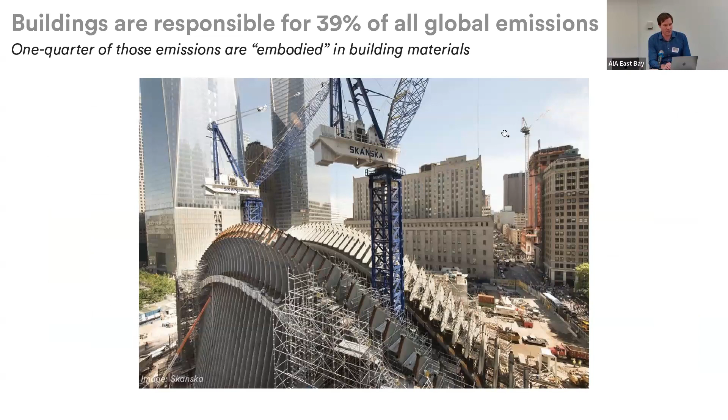So some of those, the embodied emissions, is the building materials, all the stuff that goes into a building. And the other three-quarters, the 28% of the 39%, is energy use that comes from sometimes fossil fuel used on site, but often energy from up in the Central Valley, or in big natural gas plants hidden away in things that look like buildings around the Bay Area. So a little out of sight, out of mind, but a really large contributor to emissions associated with building operations.

So we'll get back to this and try to break that down. I want to use this to show that over the course of, say, a building that'll exist from now until 2050, the building in this time will have approximately the same proportion of emissions. Depends on where you are, we'll get into all that, it depends a little bit.

But there's a little bit of operational emissions that build up year over year, and a big surge of embodied emissions in year one that persist. And we see that over the course of, between now and 2050, about three-quarters of emissions come from operational energy, like the energy used in buildings.

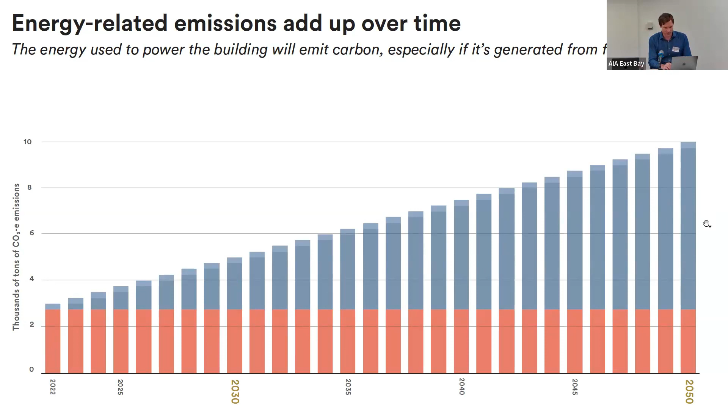And this is why for a long time, the 2030 commitment and all of these efforts have been to reduce energy use in buildings and to electrify them so you're no longer burning fossil fuels on site. Because when you have an all-electric building on a clean grid, the line starts to curve down. The delta, the additional emissions in each year, gets smaller year over year as the grid gets cleaner. You're using the same amount of electricity from a cleaner source upstream.

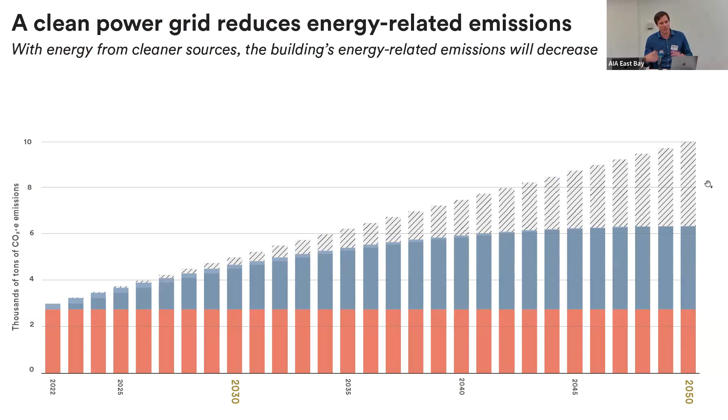And the real thing has been: we're going to electrify buildings and make them more efficient. Then you're able to get to a situation like this, which is really exciting to see. Not only is the grid getting cleaner in the background, but you're using less energy each year.

Question: is there a controversy going on right now about where the embedded, or where the operational energy, is coming from? Those sources are themselves destructive.

Yeah, we can talk some about that when we get into what embodied emissions look like for things like PV. It doesn't always... When questions come from the audience, repeat them in the microphone. So the question was: well, wait a minute, don't all these upstream clean energy solutions have impacts of their own that aren't always accounted for? This may be an interpretation of that question.

Sure. And I think one thing often lost - we can get into this over drinks too - but one easy answer is that yes, there are upstream impacts. We mustn't forget that fossil fuel isn't just the thing we burn in our gas tanks, refined up in Richmond, it's also an extractive industry with massive impacts. The amount of land that's contaminated, all the water that comes up with the oil then cast over fields, there's salt and minerals and heavy metals in that.

So in an apples-to-apples comparison, we shouldn't discount the environmental impacts of clean energy. And let's also recognize that it's not just burning fossil fuels that's the problem, but also the landscapes across which they're extracted. Does that make sense?

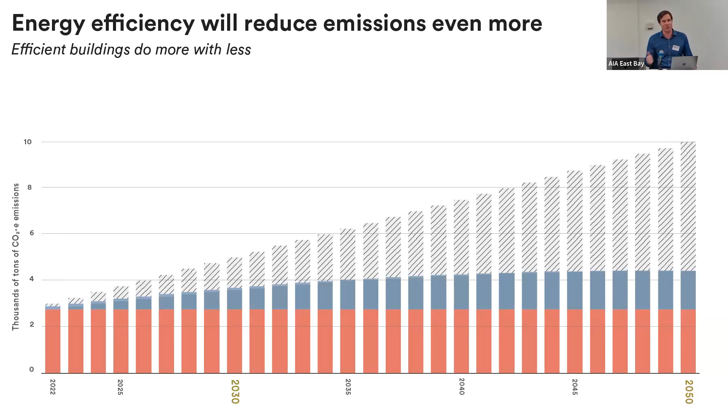So when we combine electrification on a clean grid with energy efficiency, we get to something that looks like this, where in 2050 it looks like we're doing pretty good. This is a little bit more than a 50% reduction in emissions over this time.

And if we're going to get to these big reductions by 2050, we're doing a pretty good job overall. The problem, though, is that we don't just care about emissions in 2050. If we cut the same graph in 2030, we see that most emissions between now and then near-term climate targets are mostly embodied carbon emissions, the stuff involved in the supply chains of the materials coming to the building. These are things like the environmental impacts of the solar panels, the cladding, the insulation, the carpet, the gypsum wallboard. These are most of the emissions the built environment will incur in the near term that we need to address to meet short-term climate targets.

The 2030 target is generally important because hitting lower overall global emissions by 2030 gives us the opportunity to restrain global warming to 1.5 degrees Celsius and avoid some of the worst tipping points.

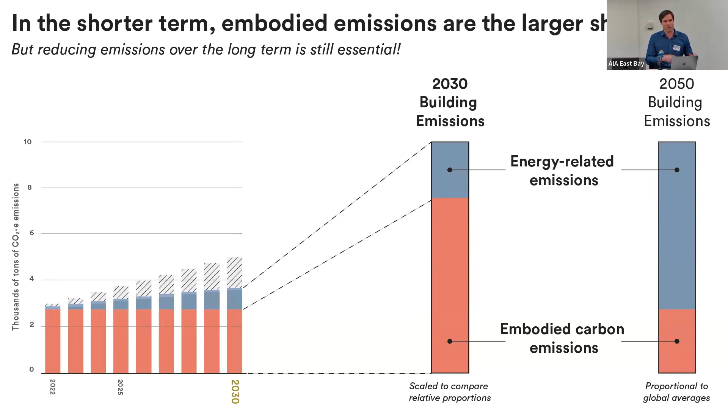So we see that when we think about near-term carbon emissions, we're really focused on embodied carbon. When we think out into the hazy future, because buildings use energy a lot over time, it's operational emissions. The point of this talk is to talk about whole life emissions, how we think about embodied and operational emissions together. If we're just talking about embodied emissions that happen in the first year, so much can be done in terms of specifying better materials, using less materials, using biogenic materials that come from natural sources.

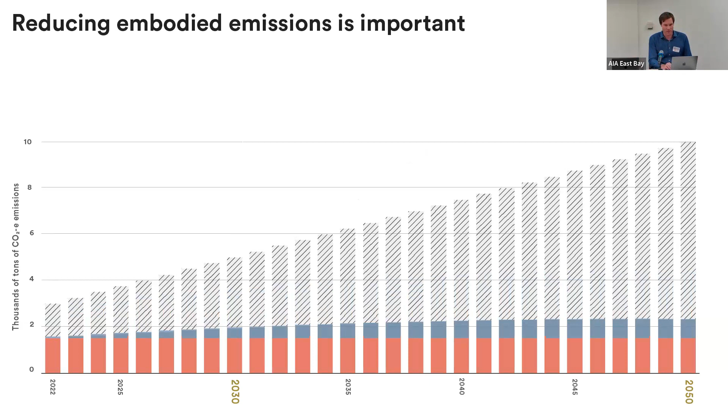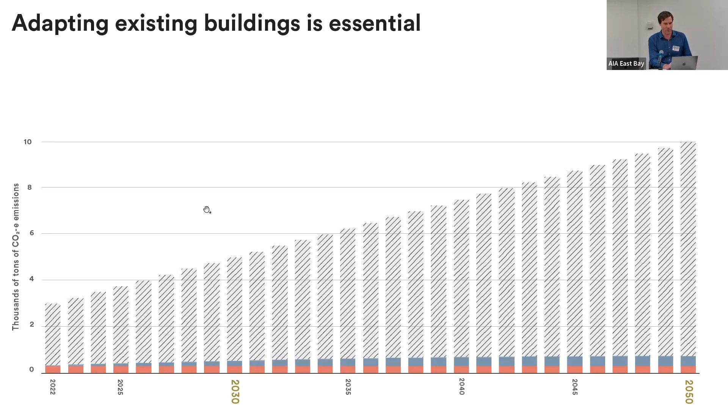But to pass it off to Larry, the most important thing you can do that avoids all those near-term emissions, so you don't have to be caught in these awkward choices between using a bad and a worse material, is to use what's already there and avoid building by adapting existing buildings. And I think I'll use that to tee up Larry for the care part of the presentation.

New building takes a lot of carbon to build. And over the next near term, the 20 years that we're really concerned about, it's about half the carbon. So we've got to start either building low carbon buildings, which is hard to do, or just building fewer buildings, which is the one that I think we should be doing.

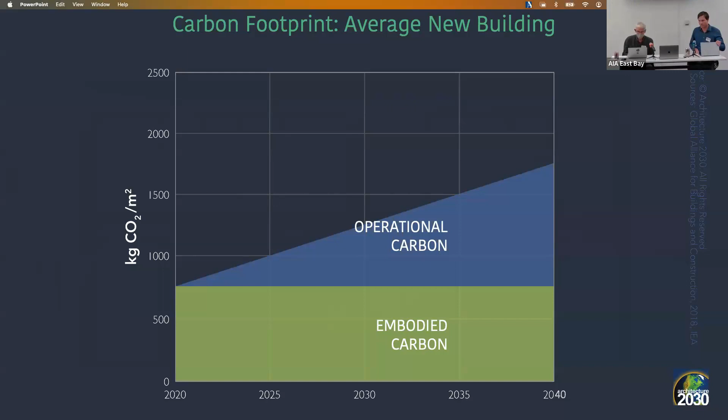So that's just for new buildings. We have a lot of existing buildings, and operating existing buildings are still responsible for the majority of emissions. These are for cities around the world, and you can see that it ranges from 55% to 76% of our emissions in those are all from buildings. So it's a huge impact of just operating the buildings we already have.

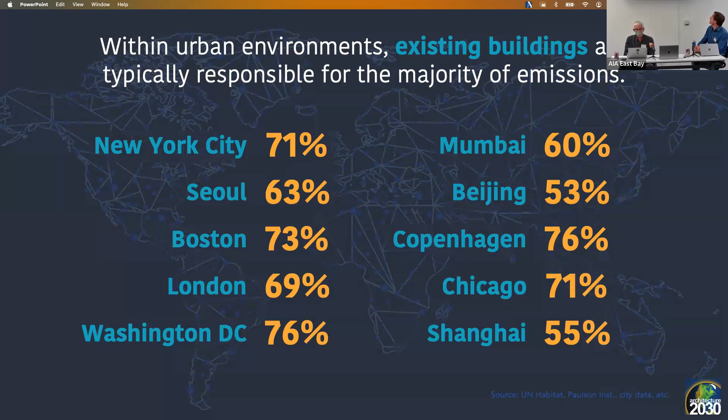And the other thing to remember is that about two-thirds of the buildings that are with us today will still be here in 2050. So they're not going away. We've got to make them better. So this is really a pitch, not just for reusing a building instead of building a new one, but for making our existing buildings perform better.

All right, so this is another interesting thing: AIA did a survey last year and asked about the main reasons they got for remodeling buildings. Last year was the first year, maybe the second, where billings for architects were greater for renovations than for new buildings. That's interesting, it usually happens during a recession, but it's continued after the recession.

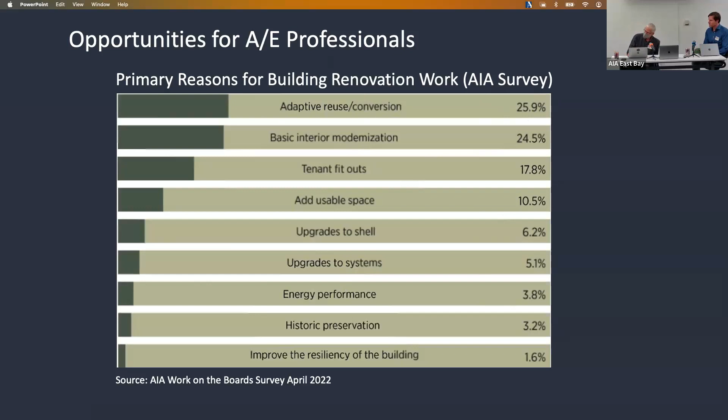So the greenest building is the one that's already built, but it's also, more importantly, the one that's been upgraded.

So I'm going to talk about the CARE tool. In February last year, Architecture 2030 launched this tool, a carbon estimating tool called the CARE tool. It's designed to do quick upfront carbon estimates comparing a reuse project to a new replacement building.

I've been working on this for about the last almost 4 years now with Erin McDade of Architecture 2030 and Lori Ferriss, who's currently chair of AIA COTE and the Zero Net Carbon Collaborative, and a lot of other things. She's actually now working at Northeastern University at a research fellowship. So there's not a lot of us working on it, but we're trying.

So it's an early phase decision-making tool. It evaluates total carbon emissions and compares the impact potential of existing building reuse to new construction.

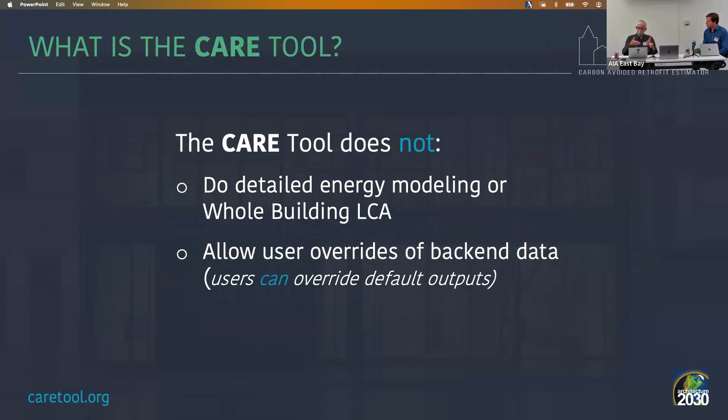It does not do detailed energy modeling or whole building LCA. It does not allow users to override backend data, although you can override some of the default settings built into the tool about grid efficiency or your climate. If you have better climate data than what it defaults to, you can enter that. So you can make some changes to it.

It's designed for stakeholders from across the building sector. We're really focusing more on planners and officials, campus planners, than on architects and engineers, since it's not really a design tool. It's designed to help with early decisions about whether to build a new building or reuse what we've got. There's lots of reasons to reuse a building or not, but we're trying to put carbon into that conversation.

If the owner or the client is interested in saving carbon, that's the first thing they can look at. Is this going to save carbon, putting a new building in, even if it's net zero or not?

And it's really interesting what you get when you start feeding this into the CARE tool. So I'm going to do a case study of EcoBlock, which is a project our firm has been working on for more years than I like to count.

Susie's the project principal on this. It's a really interesting project, and very different from the project you saw from Jack, because it's a bunch of little single family wood frame buildings. It's a really different kind of building type than we usually use for carbon analysis, which is usually concrete and steel, big massive buildings.

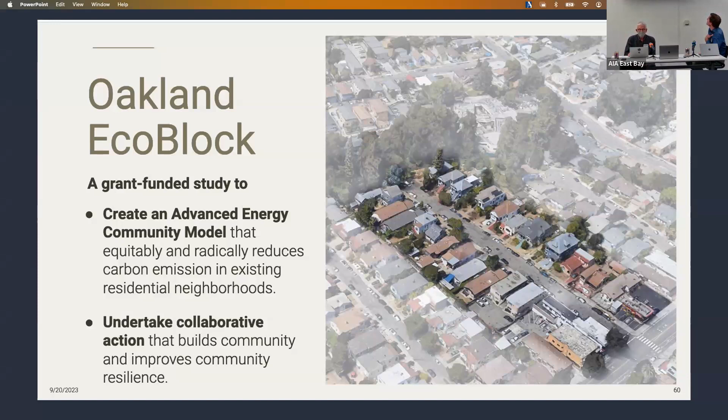So this is what EcoBlock is. It's a grant-funded study that creates an advanced energy community model. It's collaborative action, encouraging collaborative action to build community and improve community resilience at a block scale. And the reason it's at a block scale is, if you can imagine doing the same amount of solar conversions on an individual scale, it's 180 individual projects versus 9 block projects. So it's supposed to be easier.

It hasn't always proved to be the case, actually. PG&E has some problems with doing things at a block scale, but it's happening. And it's actually going to have to happen at that kind of scale if we want to meet Oakland's goal of being at net zero by 2040.

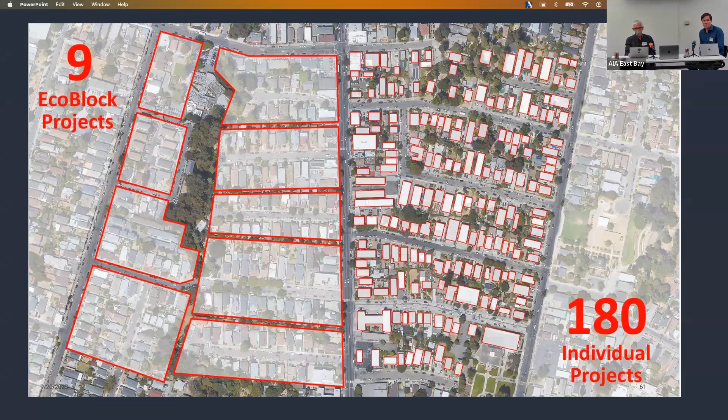Anyway, Susie should be giving this part of the presentation. So, block characteristics: there's 24 dwellings on the block. I think we're converting 18 of them. They're small projects, small buildings, pretty much all wood frame, 1 to 2 stories, built between the turn of the last century and the 1970s.

There's 18 projects. So here we go. Energy efficiency: the project includes efficiency and electrification retrofits, shared rooftop PVs, shared battery and microgrid if we can get the funding for that part of it, a shared EV charger for the block for a car, and a whole legal and financial structure of shared ownership, which is actually really key to making this work at a block scale.

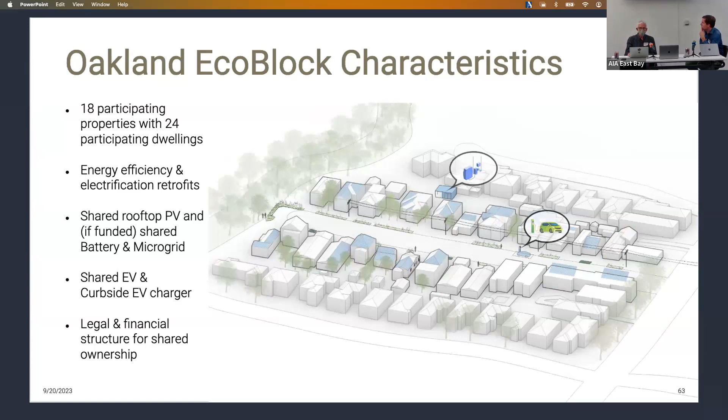Here's the block, a very cool block. It really was a case study in how, not only are we doing this great energy upgrade and this great climate project, but it really brought this block together.

A few key people really wanted it to happen, and they brought almost all their neighbors on board. It's just been this amazing sense that people at this scale, this kind of ownership, and this kind of income level don't usually have access to impact anything about the climate. It's out of their control. And this is sort of saying, actually, if you do it together, you can make a huge impact. I think that's pretty inspiring for the people that live there. It's been inspiring for all the people working on the project. So it's pretty cool.

Upgrades to the building envelope are pretty minimal. We live in California after all, it's a pretty mild climate. So they're doing attic and underfloor insulation, but they're not replacing windows. They're not doing wall insulation, which is too expensive. They're doing air sealing, which is critical, and it's pretty simple to do.

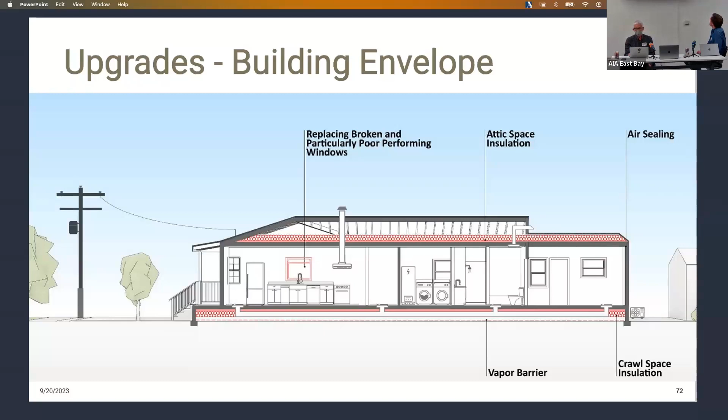And then a lot of mechanical upgrades. Everything's going electric, so all the old appliances are being replaced with efficient electric appliances. They're doing a heat pump for hot water and a heat pump for space heating. They're putting in hoods and things to improve indoor air quality as well, so ventilation.

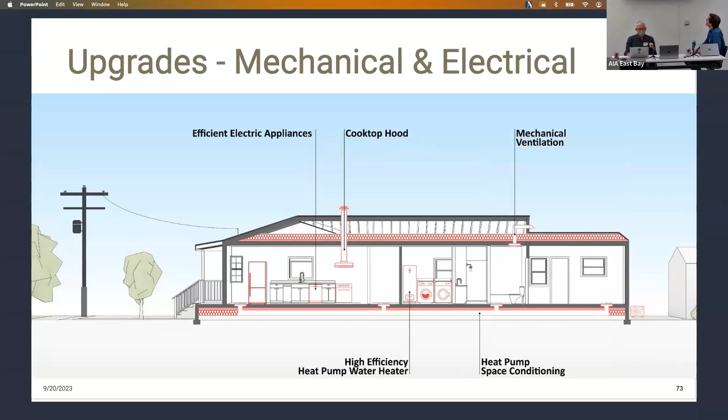Outside, everyone gets a charger and a service upgrade if needed. I think almost all of them need a service upgrade, maybe not all, but a lot. They're actually reconsidering that, and some of them are not requiring a service upgrade.

That's great. What is kind of a minimum service upgrade for a site? Everyone tells you to go to a 200 amp service, but you can actually do it on a 125 amp service. You do have to sometimes do load shifting and things like that, but you can do it. I just did it for my house and we went to 200 amps, but it's because we thought we were going to have an ADU in the backyard, and that kicked us into the 200 amp. If we hadn't had that, we could have done it on the 125.

Then rooftop solar — all the houses are different, so some houses have a lot of space for solar and some don't. The idea is to put solar all over and kind of share it for the whole block, which PG&E is also having some issues with, crossing property lines of power and things like that.

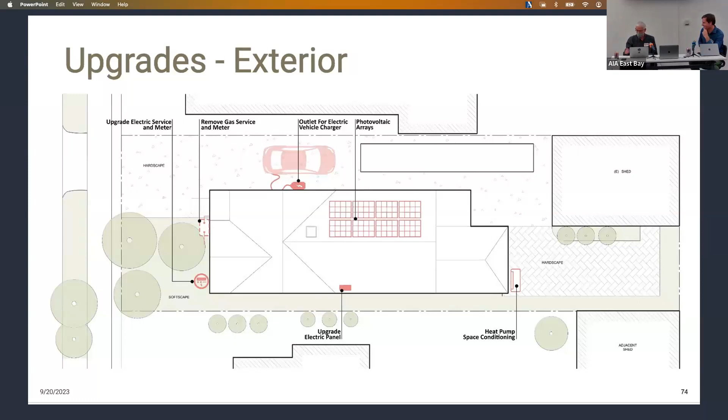This shows the difference in the level of building performance. In a poor performing building, getting to the level we need is a 71% reduction in emissions. But in a pretty good performing building, it's only a 28% reduction. So every building is being brought to about the same level of performance — some buildings need a lot of work, some don't need very much, and it averages out over the whole block.

Running this through the CARE tool, the first thing you see is the screen with four tabs across the top. You input general information about the project's location, which sets the defaults — it sets your climate zone and basic grid information about how efficient your grid is for the whole state.

But you can go in and change that. For the grid settings, we selected high renewables — by 2040 California is aiming to be at high renewables, that's their goal. You can leave it as is, which is what it is now, say high renewables, or say net zero grid by 2040, which most states probably won't meet but California will get close to. Then you put in the model time frame you want to look at, and because 2040 is our cutoff, we're saying 17 years from now, to see what performance will be like in that time.

Then you put in information about the existing buildings. In this case, we used a total square footage for all the buildings since they're all the same type, all wood frame. We picked the type of structure, wood frame hybrid — wood and steel, or concrete, or steel and concrete — which generates some of the embodied information. You put in the use, and since there's no single family use in our calculator because it's based on the zero tool, we used multifamily, which is about as close as we can get.

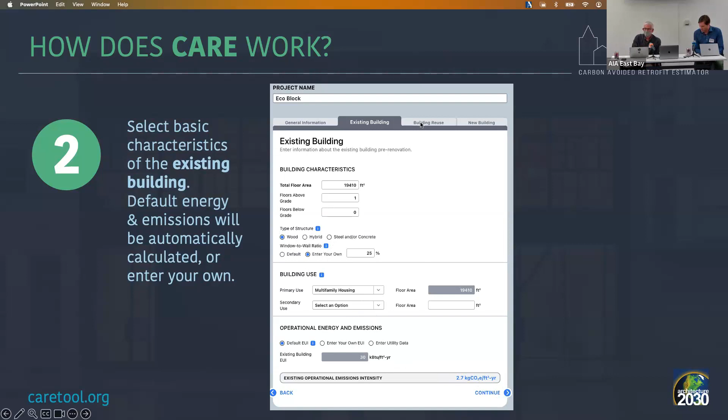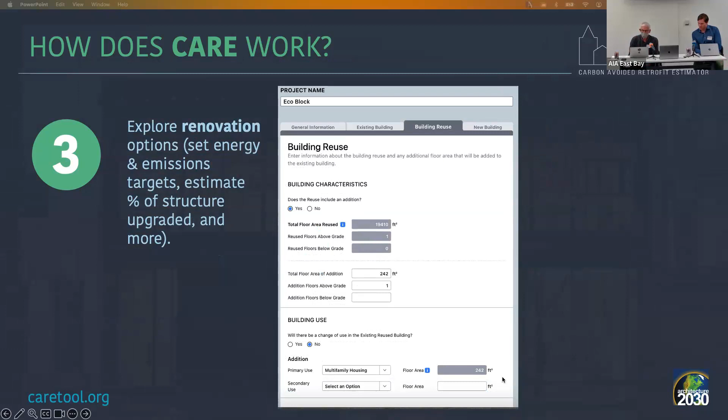Then the next tab, you look at the renovation options. You set targets for operational emissions, estimate the percentage of structure and other parts of the building that need to be upgraded. You put in the same information about whether you're adding an addition, what's the square footage that's changing, and a lot of information about your targets for building efficiency.

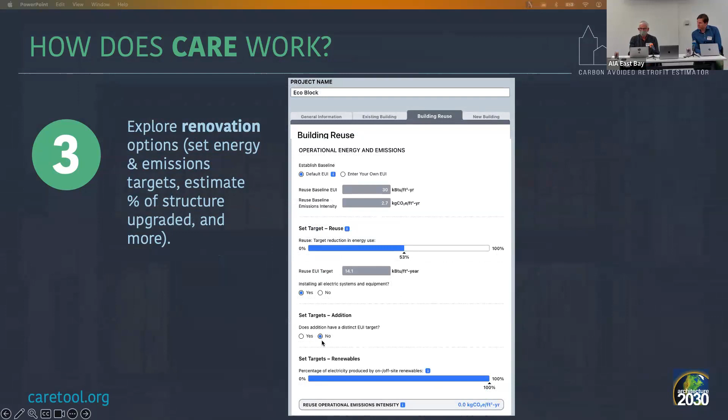In this case, we're saying about a 53% reduction in emissions was what this was modeled at. 100% renewables and all electric is what this building's going to be when we're done. All the buildings will be.

Then you put in different tabs where you can look at the different pieces of the building. Structure is the big one. In this case, we're not doing anything to the structure, so that stays zero. The envelope, we're doing nothing to it, actually very minimal. We're replacing some roofs, adding insulation at the roof level, which isn't counted with that. Interior reuse, we're leaving alone. Mechanical's the big one—we're replacing all the mechanical systems, heat pumps, a lot of the wiring, some plumbing, so that goes up quite a bit.

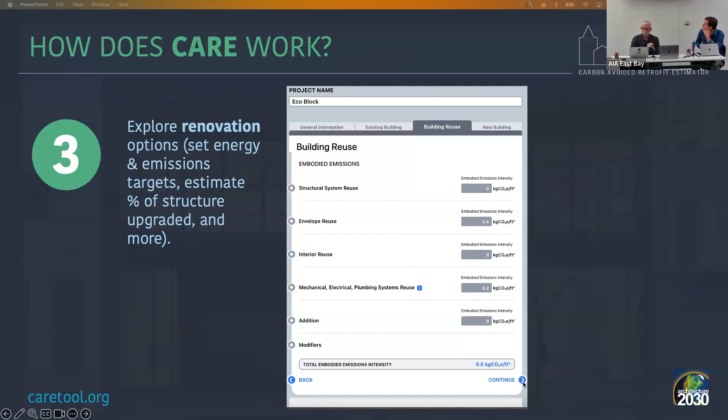So this sets your embodied footprint for the remodel, and you get both operational and embodied footprint.

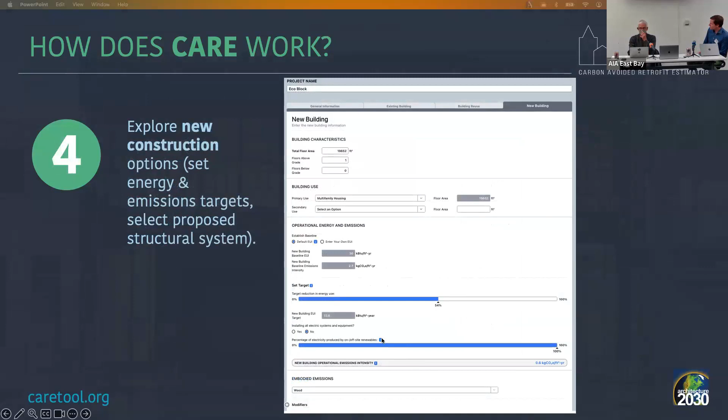And then the next tab is the new building, a replacement building. You would, in this case, replace it with the same type of building, a wood frame building. You'd set the same targets for this one, and the same—it'll be all net zero and all electric. And then you get the charts.

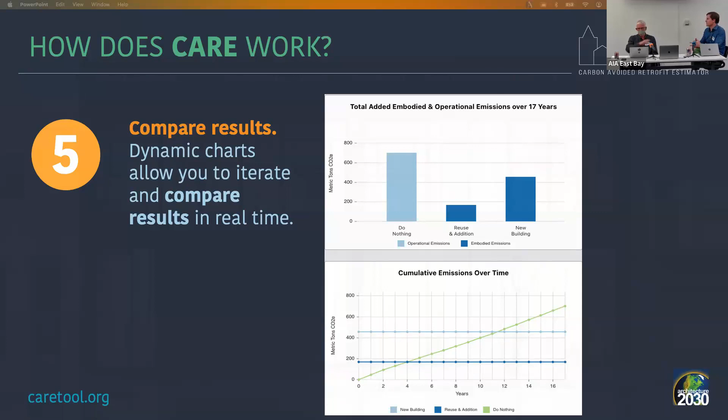So, I think these are just more of Aaron's little tabs that come up here. Pretty cool, huh? Okay. All right, here we go.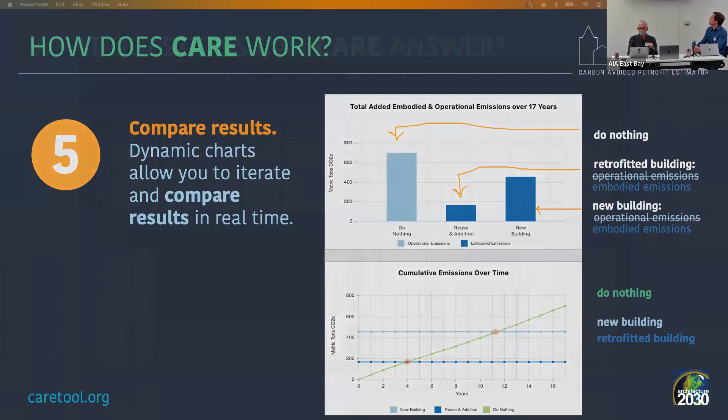So these are some of the questions that you can answer by using the CARE tool. How much carbon can you avoid by reusing it compared to remodeling compared to replacing it? What if you can only reduce its operational emissions by 50%, but you can replace it with a new net zero building? It's really interesting to put that in, because sometimes if you can go to net zero and really can't make the building more efficient, the new building's a better choice.

What are the impacts of geography, grid intensity, and condition of the existing building? It's really interesting to put the same building into California and then into Tennessee or Wyoming and watch what happens to the grid—the emissions are much higher because most of their electricity is coming from coal, so it's really high. Those are also really interesting.

And then looking at the bigger picture, can this contribute to carbon neutrality targets? And then if you're into historic buildings, using it to look at the greenhouse gas benefits along with historic tax credits, things like that. So there's a whole lot of things we're trying to do with it.

One of the things that's interesting is that it's now set up to do it on a single building level. The next phase of this project is to try and do a portfolio level, so you could actually look at a whole portfolio of buildings at once. A city planner could use it, a campus could use it. We've done one campus study, but we had to enter every building ourselves, and we're trying to come up with a way to do a portfolio. That's in the next round of funding for this.

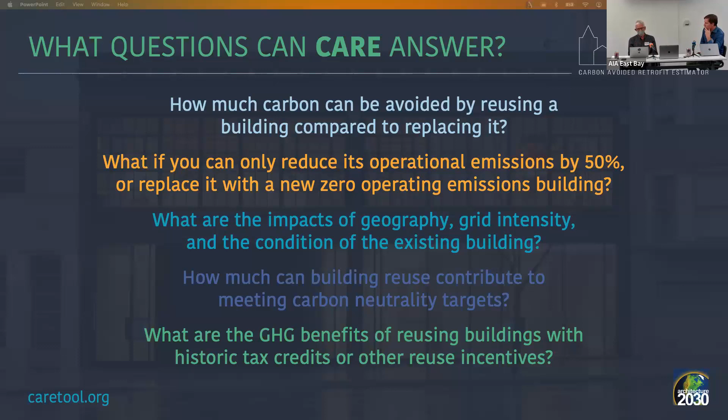So that's it. I think I have to get out of this.

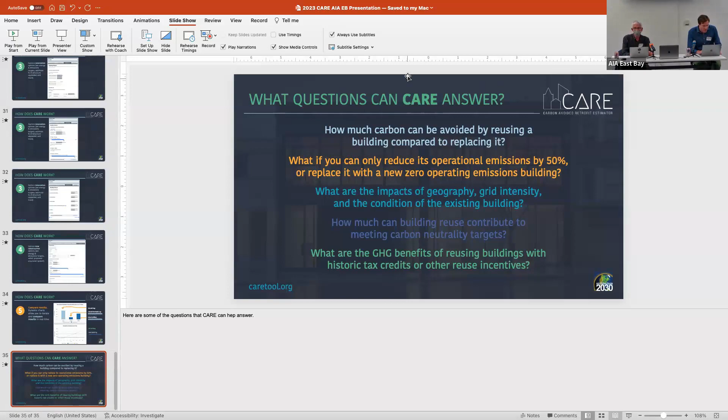Stop share. Craig asks, do blurry faces contribute to climate impact reduction? Craig, the answer is yes. I don't know, just a silly question about blurry faces.

Cool, I'm going to take it from there. As I finish the tech stuff, I'll start by asking the audience, people in this room or on Zoom, how often are you doing energy modeling on a project? Is this beyond Title 24, like a performance energy model? Is it all the time? Anybody all the time? Some of the time? The best of times, the worst of times?

Anybody on Zoom want to contribute on how much they're doing energy modeling? I'm looking at the chat right now. Thanks, you look at the chat. Has anybody here - somebody says rarely, clients are not requesting it. I do it anyway. Thank you, Craig.

Anybody doing LCA, life cycle assessment, on their projects, or done some sort of embodied carbon analysis of any kind on a project they're working on? Starting a little bit, right. A yes, good, a yes. Okay, awesome. Anybody using Tally? That's a common one. Some people using Tally.

Does that work? Oh, right away - I love it. Crosswalking energy to carbon, right? Not all energy use is the same, so you've got to understand how it works. There's all sorts of funky variations. We know in California that when you turn your lights on during the day, there's actually very little carbon on the grid a lot of the time because there's a lot of solar in California. When you turn your lights on at 6pm, the grid is sometimes really struggling because everybody's getting home and turning the lights on, running their dishwasher, turning on the television, cooking on their electric stove. So there's all these funky variations by time of day. I'll just say there's variation - there's a difference between carbon and energy.

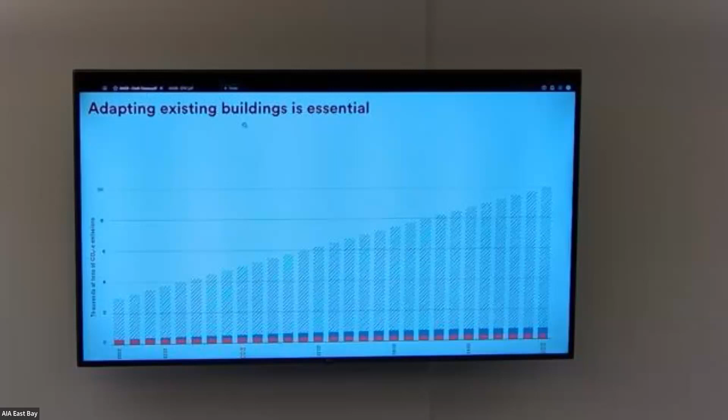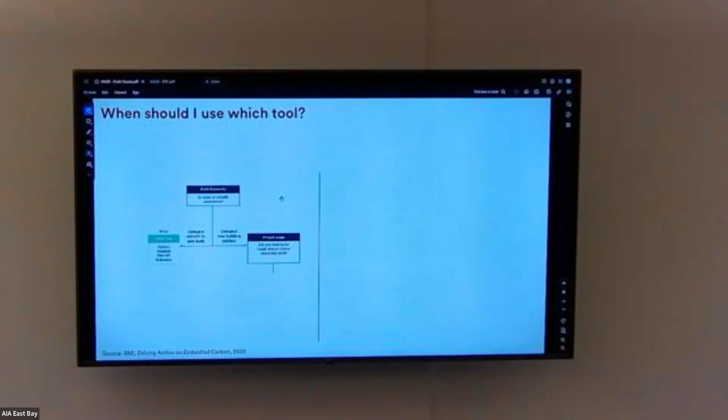Tools like EPIC and CARE really help you make that translation, and I think both of our intentions did make it pretty accessible. One thing to talk about is when you use which tool, because there's a lot of tools out here. When do I use Tally? When do I use this or that? This is a figure I'll walk through from a recent report by the USGBC and the Rocky Mountain Institute, their Driving Action on Embodied Carbon in Buildings report, which is being presented as a preview of what might end up in LEED v5.

The first question they ask is: is the building necessary? Are you considering reuse or retrofit? They say, what might you do then? If you're comparing retrofit to a new build, the first stop is CARE, right? In this decision tree about what to do when, CARE is the first stop as you're considering this difference. Okay, are you comparing different new building options? For whatever reason, you weren't able to find a reuse strategy. Then it asks, are you looking for a rough idea or higher resolution of data?

And I'm going to do this - they do it in a long thing, I'm doing it in two columns to make it work on the slide, apologies for this. They say, okay, that gives you two decision points here. Do you need early guidance to drive decision making, or do you need detailed guidance because you actually already have the bill of materials for the project? Jump up to this side where it continues - if you're looking for early guidance, that sounds great.

You have two choices. You can use Athena, the eco calculator, a simplified LCA that comes out of Canada—super cool, assembly-based tool. You need to know a bit about the building to assign all the assemblies correctly. And it gives you all the different indicators, not just carbon.

If you're just looking at carbon and energy, this is where Epic, the tool that I work on, comes into the flow. There's other things you can do, like Kaleidoscope, an excellent free resource from Payette, for comparing different building systems. And Carbon Designer 3D is an awesome tool built into the One Click ecosystem—pay to play, a little expensive, but a great tool.

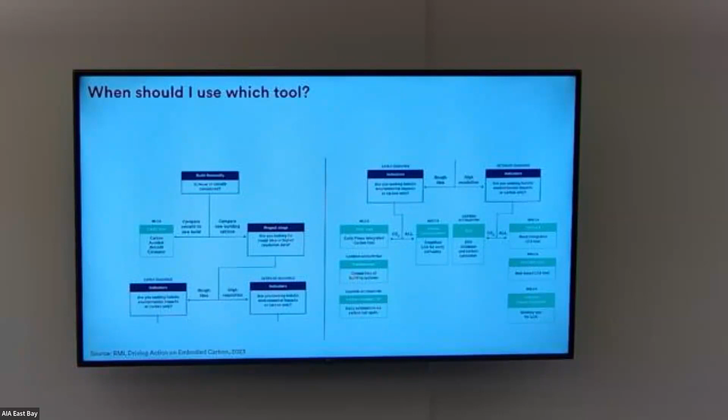Okay, now my part of the show. I'm going to talk about Epic, which is our early design tool we've been working on for a couple of years. But really, another thing I want to call out here is that, yeah...

Oh man, sorry everyone, too many steps here. Yeah, gosh, sorry y'all. Okay, how about now? Oh, I see it. Wonderful.

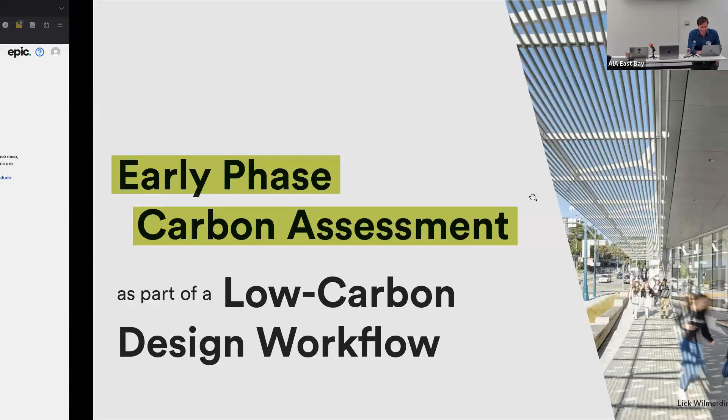Early phase carbon assessment is really just one stop along the way. The goal is to have this integrated into our design process in whatever way we can, so that as we're making decisions on a project, we're getting feedback about the carbon emissions. Epic is one tool to do that, but it takes a village across a project and across the landscape of software solutions.

So I'll talk a little bit about Epic and give a demo—I think that's the easiest way to do it sometimes, live. Epic, like Kaire, is a whole life carbon tool: embodied carbon, operational carbon, landscape strategies, hardscape, and as of recently, refrigerants—all the stuff that moves through the pipes.

There's a lot of different strategies you can investigate with Epic. The question is always, what's the one best thing I can do on my project to reduce its carbon emissions? The correct answer is: it depends. Epic is a tool for investigating what it depends on and making your own strategies and determinations.

For a long time these decisions were made by a few firms, by experts who'd been doing this for 10 years and could stick their finger in the air and figure out which way the wind was blowing. The idea of tools like Epic and Kaire is that this actually needs to be in the hands of every designer on every project.

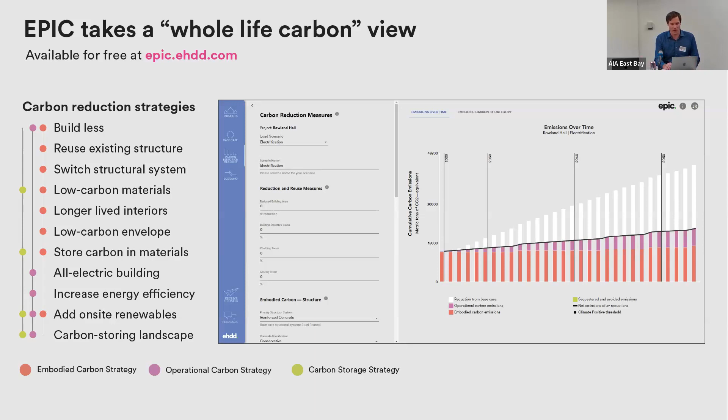And actually, a lot of those experts do a lot of projects in California. Like Larry was saying, if you do that same project in South Dakota, you'll see a totally different set of patterns—where the materials come from, the local concrete available, the grid you're attached to. So if we're making decisions based on local context, we need more data before doing projects in other places. Tools like this that contain that data help designers make those decisions.

They come out of the earth, they're transported to some sort of factory, they're manufactured. From there, there's the construction process from the factory to the job site, assembled on the job site. And that process from raw material extraction to installation—that's the A phase of buildings.

The B phase is all the things we do day to day, like living in buildings, the use phase of buildings, maintenance, repair, mowing the lawn, vacuuming the carpet, replacing the drywall, repainting, doing the facade upgrade at year 20, using the energy every day. And then the C phase lives in the distant future. This is the end of life of the building, when it eventually gets demolished, disassembled, sent to landfill, recycled.

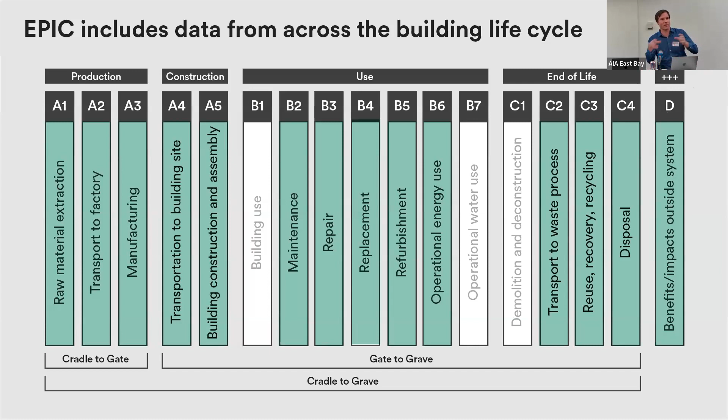Whatever else will come to it, incinerated. And then the D phase is this special phase that we use to talk about things that are related to the building, but not in it, and typically benefits. So for instance, if we are generating solar energy on site, that's great. We're not producing any carbon emissions with our electricity. If we're going to make a claim that we're actually displacing carbon emissions that would otherwise happen on the electrical grid, that's a D phase thing. We're making a claim about something we're doing on the building, it's important.

Something else is happening in some other part of the world. That lives in the special category where we talk about it, but we have to sort of put it in air quotes, because it's not a direct thing—we're not actually avoiding carbon, we're incurring something happening elsewhere. Or when we talk about timber, you say timber stores carbon, and that's true and important. Actually, the sequestration of carbon in timber happens in the forest, it doesn't happen in the building. So that sort of sequestration of carbon is also a D phase thing—something we count, something we care about, but we have to put it in brackets off to the side.

And these are the sort of components of a life cycle assessment, where the goal is to measure through this process all these different impacts and benefits.

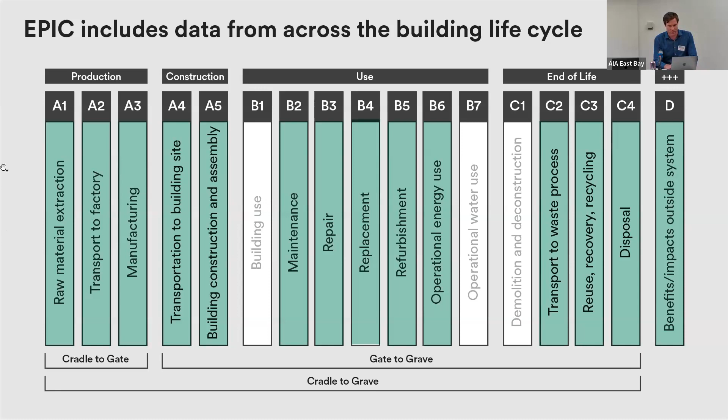So typically when you're doing an LCA on a project for LEED points, you are looking at the core and shell of the building only. For a long time, it seemed like embodied carbon snuck up on people. People were really worried about energy use, had it kind of figured out, and then they're like, oh my gosh, all these materials go into buildings, and we had never really considered this before. If you're just looking at core and shell, you're really in for a treat, because a lot of other stuff goes into a building as well.

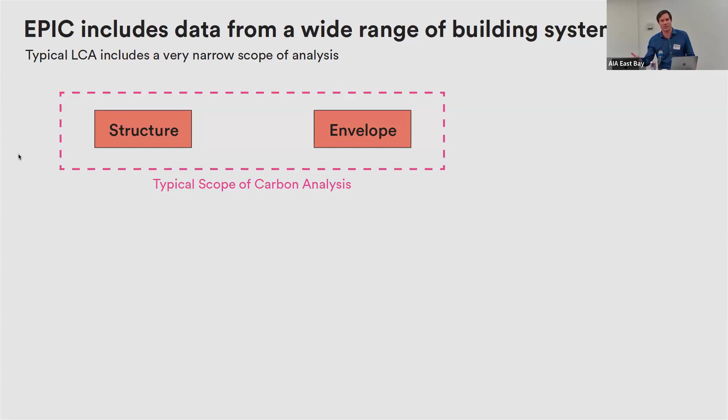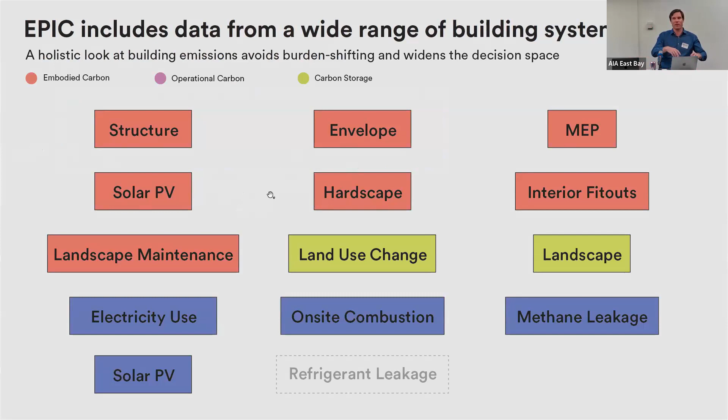We're really trying, in Epic, to expand the scope of the analysis so that we're not blindsided again in 5 years. Okay, we sort of figured out concrete and steel well enough—well, then the things we have to worry about are the MEP systems, the solar panels, and other clean energy stuff that has emissions associated with it. Hardscape, everything beyond the building. Interior fit-outs is a really big contributor, especially in retrofits, and all these other kinds of contributors to emissions from a building. So the goal of Epic is to put everything on the table and let project teams figure out where the biggest impact is to be had.

This is the kind of anatomy of the model, and it's a simplification in a sense, but it's all true. What Epic does is you define in the tool a basic building, a sort of shoebox building. And then from that building, the model does a set of material takeoffs, a set of assembly takeoffs. So it says there's this much concrete in the structure, this many square feet of envelope, and the building uses this many kBTU of energy per year.

Against each of these takeoffs that happens against the building, we assign a set of GWP factors—GWP is global warming potential. So the carbon emissions associated with the concrete, with the envelope, with the energy use. And then that gets all rolled up into the results of the model. So it's this pretty simple process: define a building shape, figure out what's in it, add some carbon data to what's in it. And then what you get to do as a user of the tool is play with all those little toggles, change the shape of the building, change what the materials are going into it, change the amounts of different assemblies, and change especially the carbon intensities of those materials.

That's sort of the purpose of the tool. And then in the tool, you'll see there's pretty good documentation, we hope. It's been developed mostly through feedback from people using it, to make sure that all the data behind the tool—its assumptions and its methodology—are transparently communicated, so that it's helpful to project teams in setting goals on projects.

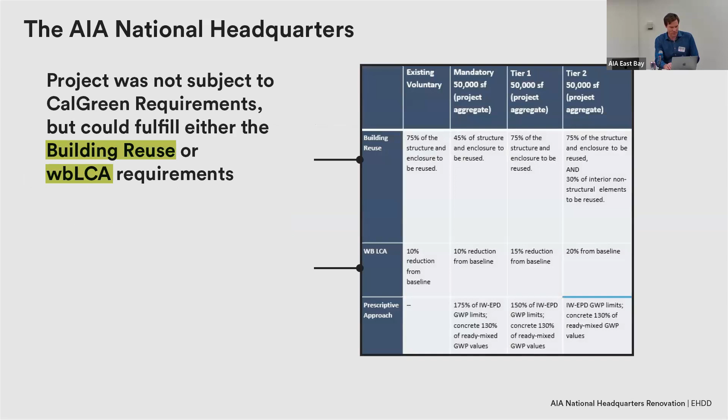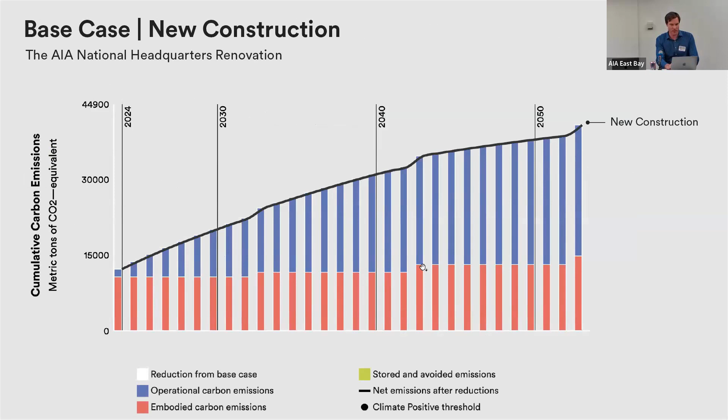What we're going to do, we put forward on day zero during the interview phase of the project, we used Epic to show this strategy, where if this is emissions from new construction, here's the year one emissions, there's all these little replacements over time, here's the accruing emissions from energy use. If you retrofit the building, your emissions in year one go down to very little, and there's still some emissions over time, obviously.

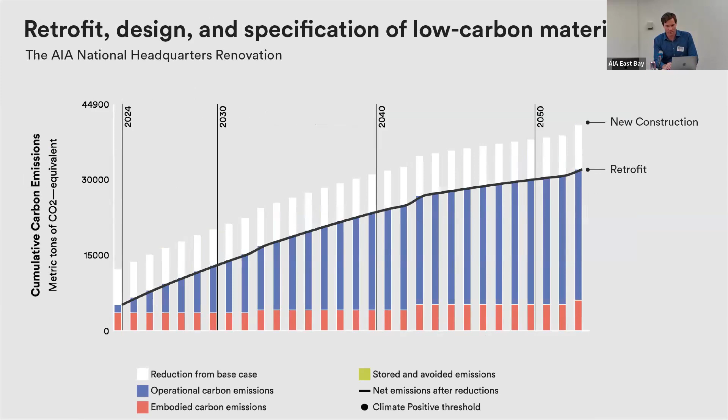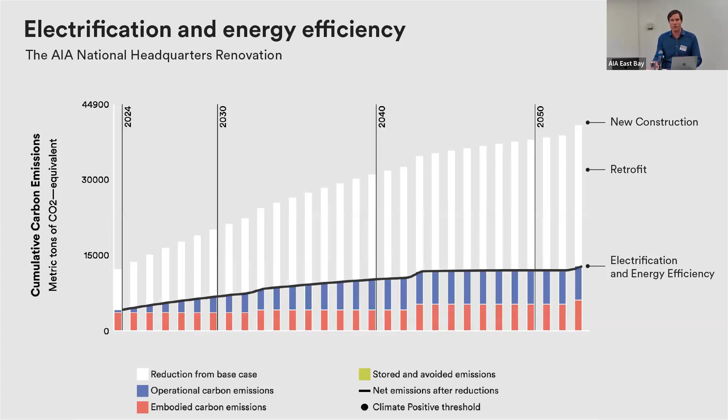We haven't done any energy retrofit so far, right? This is just preserving the building. We're going to increase energy efficiency and electrify the building. That helps us force that curve down in the way we saw earlier. For any energy left in the building, we're going to make sure we're procuring one hundred percent clean power through an agreement with the local utility. That gets us to approximately zero carbon energy.

There's a little bit of emissions left over because of these variations in the grid, and there's still all the embodied carbon left over. This gets to the earlier points about how a building has environmental impacts, and it has environmental impacts we can't ignore. But what are we going to do about this remaining embodied carbon?

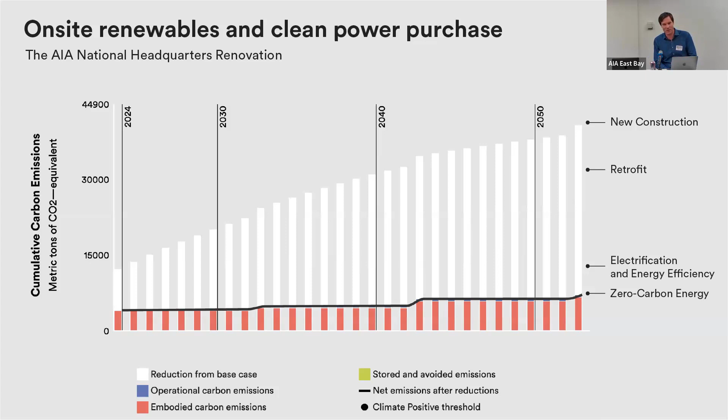So beyond reducing it to an absolute minimum through retrofit strategies, through a ton of reuse strategies of almost everything we could in the building, and a low carbon specification of things like concrete, we proposed to the AIA that we would enter into agreement with a local set of Habitat for Humanity projects where we would fund dedicated community renewables on those Habitat for Humanity projects.

And the carbon savings, they get the free energy from the solar panel, and the carbon that's avoided becomes the sort of offset, for lack of a better word, that the AIA is investing in to connect the full decarbonization of the headquarters to the AIA's goals for social equity. Trying to combine decarbonization and social equity, often viewed apart.

Our argument here during the proposal was that these things were equal. The problem that EHDD ran into is that for this to work, we're committing to a certain size of solar array that we're saying the AIA is going to buy on these affordable housing developments. And that means there's a financial kind of price tag we put on this, right?

So this actually makes it really important that at the very beginning of the project, we're pretty confident about what this number is, the carbon we're saying that's going to go into the building, because it's not just a number we're throwing in the air. We're saying that here's an offset strategy that has, I think, a lot of importance for the AIA, and we're going to meet it by hitting this target, right?

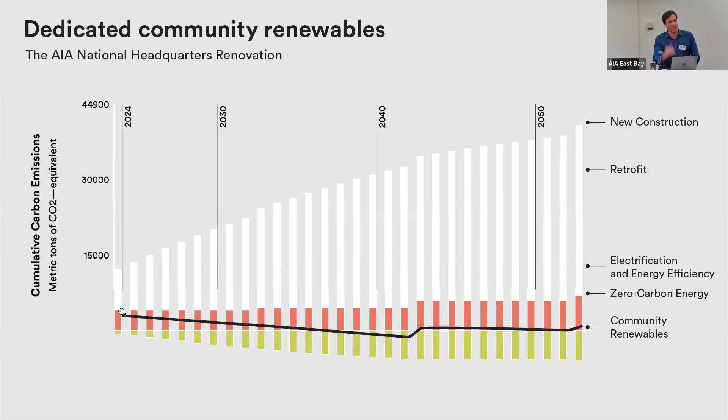So we committed to that in the interview phase of the project using Epic. And this is the slide from the interview that laid out some of these strategies. Here's the energy efficiency strategy you saw, here's clean electrification with the procurement of renewables, and here's the local carbon offset project.

This was, obviously winning a project has lots of components, but I think the ability to make this proposal at the beginning of the project and commit to these numbers, which were fairly aggressive, before we've probably even walked the project more than once, right?

Was I think compelling. With that, to the client, we have to say how much that was going to cost for the project. Was that part of what you had to say at that proposal?

It was. I think there's another wrinkle here actually, where the first thing proposed was that we really wanted to do a set of boiler replacements on schools in the area, because once you replace these old boilers, you touch a lot of other systems. That didn't work out. So what it cost to do this project probably changed as the strategy changed. I'm kind of omitting some of that because we had to change approaches because of the complications of doing boiler replacements, but that was the idea at the time when we started.

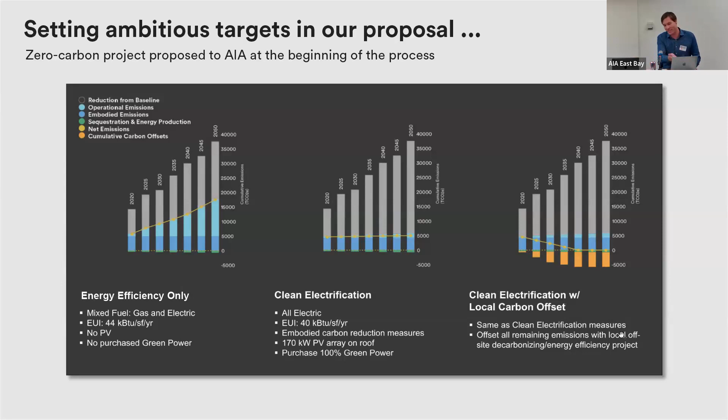So we set this carbon budget in the interview phase, right, at the very beginning of the project. And then this year in March, we got to 100% CD. I put a little bar in here to say that there's still a little bit of uncertainty. The building's not built yet, the concrete's not all poured, right? We don't know if this is actually going to happen. The process isn't over until it's over. But at 100% CD, we were at this line, which was to say we were within 5% of the goal we set at the beginning.

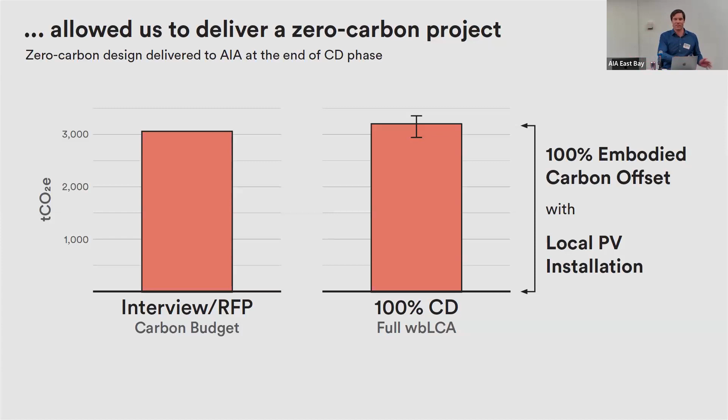And this wasn't because Epic is a perfect tool for understanding everything that goes in the building. No, like all these early design tools, it's a goal setting tool. And I think this shows the importance of just setting a goal early is what allows you to meet that goal at the end of design, right? If you don't set the goal and you're just sort of stumbling along through a project, you'll get somewhere. But if you set a goal, and with this process of doing LCA in every design phase, this is what kept the project aligned with our carbon goals through time. The path, as much as diagrams might show it going A to B to C to D, was a pretty twisting path. Design is a complicated process, but Epic allowed us early on to set the goals that allowed us to meet them at the end of the project.

So I think there's a little bit of time left over. I'm going to do a demo of the tool, just to kind of walk through it and talk through some of what it does. Maybe I'll zoom in a lot more on the screen. Is that kind of legible to people?

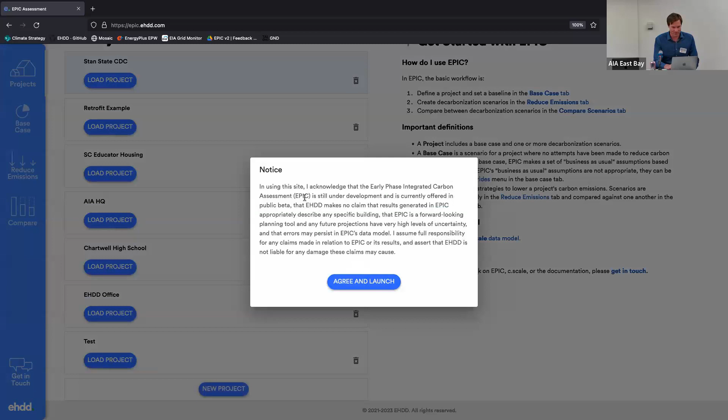A little bit-ish? So the idea in Epic is that first you have to agree to this disclaimer. It says EHDD cannot predict the future. Oh, come on. No, people like anecdotes about that.

We use these projections put together by the National Renewable Energy Lab of what the electrical grid is going to do between now and 2050. These changed drastically between 2021 and 2022. Does anybody know why? The IRA. Not because the IRA itself decarbonized the electrical grid, but because of the way we expect the electrical grid to evolve in the future, the change in solar incentives, minor as they may feel sometimes within the IRA, totally changed our projections of the way the grid will decarbonize, because it changes some of the basic fundamental math, like the economic math behind the grid.

In California, we were totally wrong for a year because everybody thought the Diablo Canyon power plant was going to go offline. And then the governor said we're going to keep it online for the next 10 years. We don't know these things are going to happen in the future. Epic is a forward-looking model. The future is uncertain, right? That's the disclaimer. But the idea is that once you accept that fact, you can get some idea of the carbon emissions over time pretty quickly.

So let's just call this the AIA East Bay office, a project we're going to complete in 2025. I'll use my home zip code because I bet it's the same one as here. We'll say the default structural system - we're not going to try very hard, it's just going to be reinforced concrete. It's going to be an office with maybe 3 or 4 floors, like this building, and the floor plate's approximately 10,000 square feet, making stuff up.

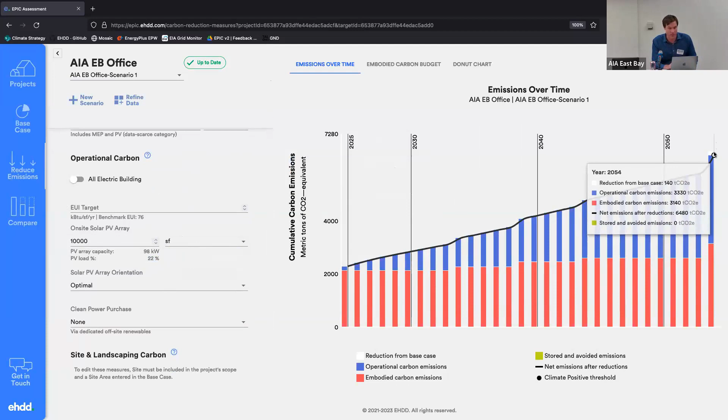Let's say we put in this 10,000 square feet of solar in this building in Wyoming. It doesn't do very much, but let's say it's going to take up 22% — let's just look at the reduction. What's this reduction in the final year? 140 tons of CO2, actually not shabby.

If we go to the base case and change this to — what was the Massachusetts one? 01451. That'll recalculate to there. We go back to the reduced emissions, and we see that the same amount of solar only reduced 40 tons of CO2, right?

We're doing a ground-up school right now in Utah. If I make the set of assumptions I would make in California for the way we balance our energy strategy, for a building in Utah — and I'm just making it up — as we're going after a project, I'm probably going to be wrong. Understanding these trade-offs between the electrical grid and everything else is helpful, so it's good to have data-driven tools like this. Is the grid just as it is right now, or is this projecting over the next 30 years? This is projecting, yeah, with the data from NREL.

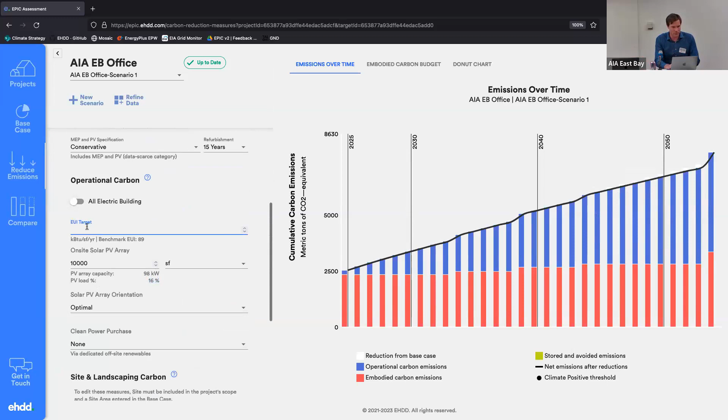So on top of this, like we put a little bit of solar on it, we see that this solar produces 16% of the energy for the building. Well, let's set an EUI target in this building of 45. We see the emissions reduction from that. We can save this scenario.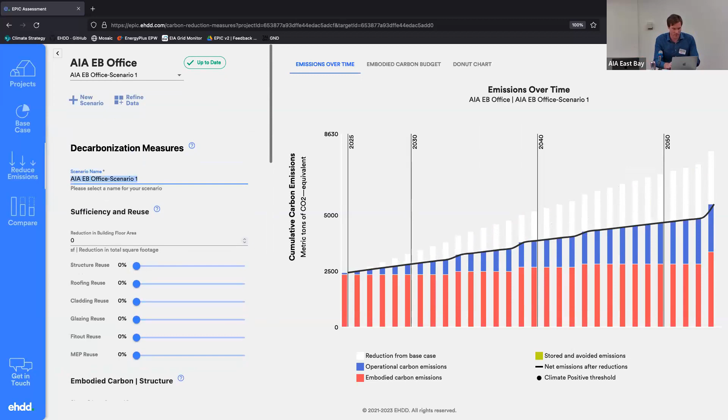This is going to be solar and energy efficiency — we'll just abbreviate as EE. And then what we can do in EPIC is make another scenario, as a copy of the current scenario. Makes a little copy.

And now let's do, let's say the AIA East Bay headquarters, which I think is in Massachusetts now — so there's an East Bay. Exactly, yeah, just a different bay, right?

If we do a wood frame building — Larry mentioned that a wood frame building is actually super low embodied carbon. People like mass timber, we do some mass timber work, very nice. Mass timber, the word 'mass' means there's a lot of it. The nice thing about light wood frame is that it's light, right? So instead of being a reinforced concrete three-story building, what if we have this as a light wood frame building? We see a reduction in embodied carbon in year 1. And what if — there's always some concrete and steel in all these buildings — we make sure that everything we procure is super low carbon, the lowest carbon stuff we can find in the local area.

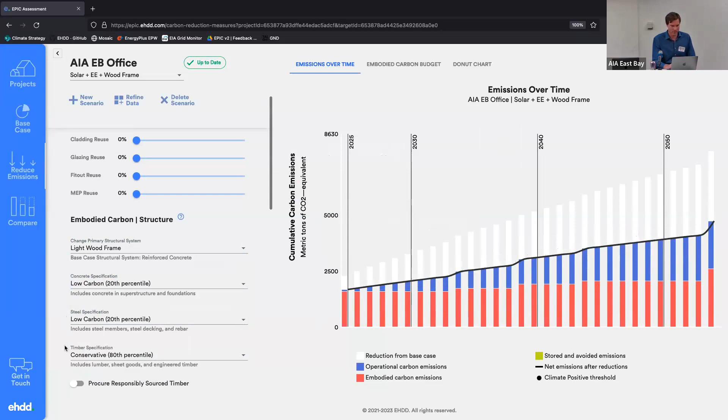Right? You can just set these settings. And you probably have the question of what it means that it's low carbon 20th percentile. Any of these question marks in the tool bring you to the documentation, which gives you these data readouts that say, these are the things you're committing to by making this choice.

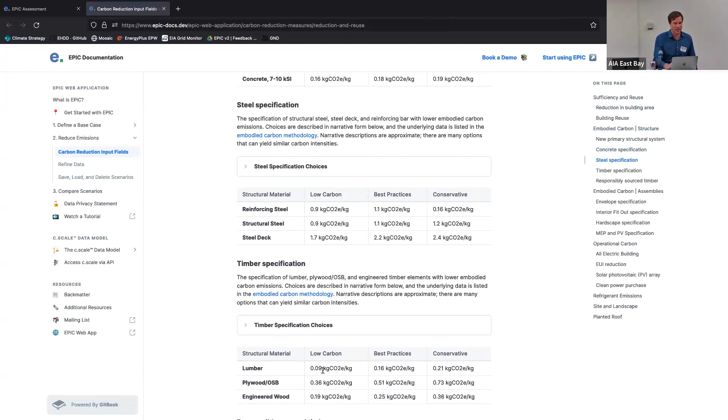And then you can take this forward to your other procurement tools. You're looking at environmental product declarations, and this becomes your way of setting those goals. So are those typical goals for the whole country, or tied to the state you entered? For wood products and steel, it's national, because the supply chains are national.

Concrete is hyper regional. Right, okay, good. And we use data from EC3 to do the concrete carbon emissions. The unfortunate thing we're working on a bit behind the scenes is we can't just publish one number for concrete. It's a very useful number for a project team to have, but it's going to vary. So we're going to find a way to get that into the tool soon.

We still see a reduction in overall carbon by the final year, but obviously there are trade-offs when you install solar on a building. With a wood frame building, we get lower emissions. I'm not super satisfied yet, so let's try to put together a scenario where we can really push it all the way.

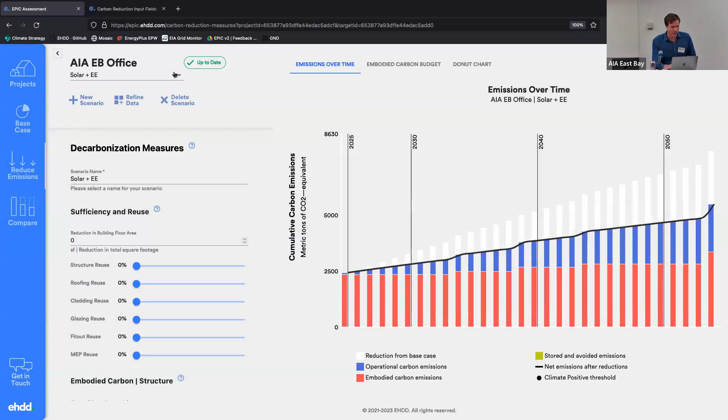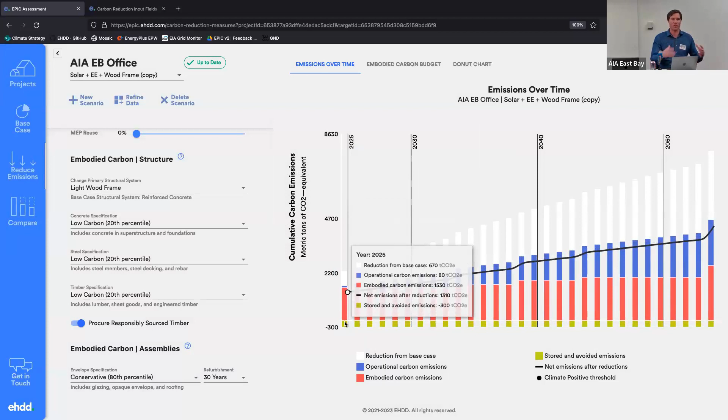I'm going to select this wood frame scenario we made and create a new scenario that's a copy of it. With it, we're going to procure really responsibly sourced timber so we can claim the climate benefits, from a transparent and traceable timber supply chain. It's going to be FSC certified, which is enough to claim the sequestration benefits, the carbon stored in timber, vouching for the forestry practices we're procuring from.

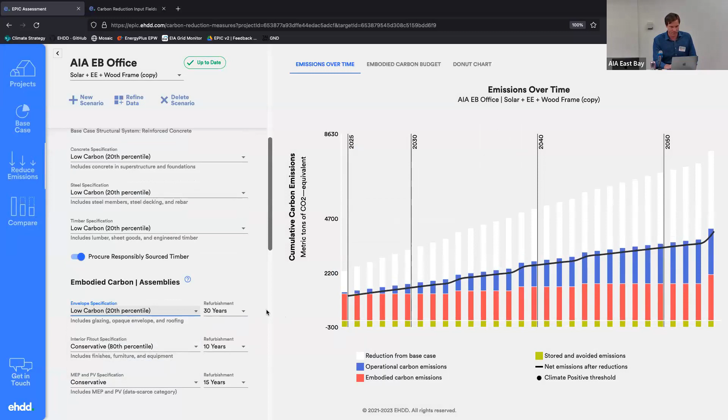The envelope, we're going to have a really low carbon envelope, refurbished not every 30 years, but every 50 years. So long-lived, low carbon material. Does it exist? We hope so.

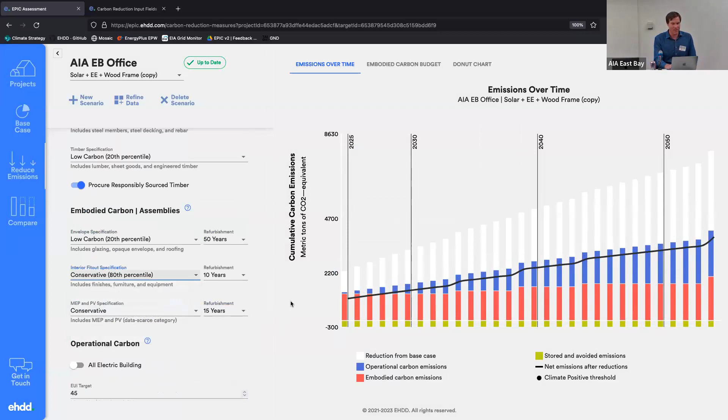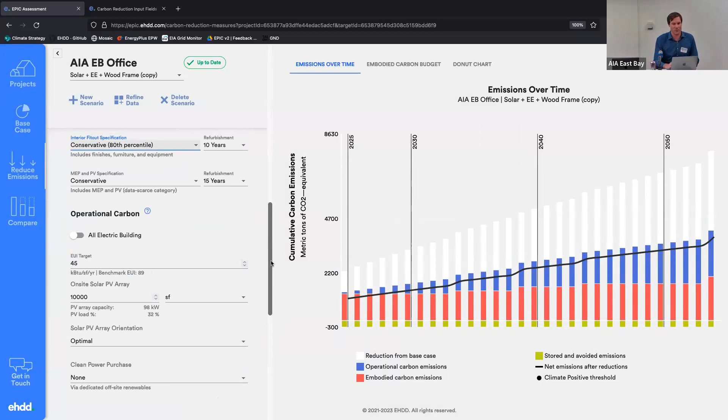Because the interiors get replaced 4 or 5 times in that time period, while the structure and envelope stay the same. It's small, but it keeps getting redone. So we're going to have really low carbon interiors, which helped a lot. And for MEP, there's not clear pathways right now to low carbon systems. I wish I could tell you otherwise, but we're at least going to make sure we replace them every 30 years and not every 15.

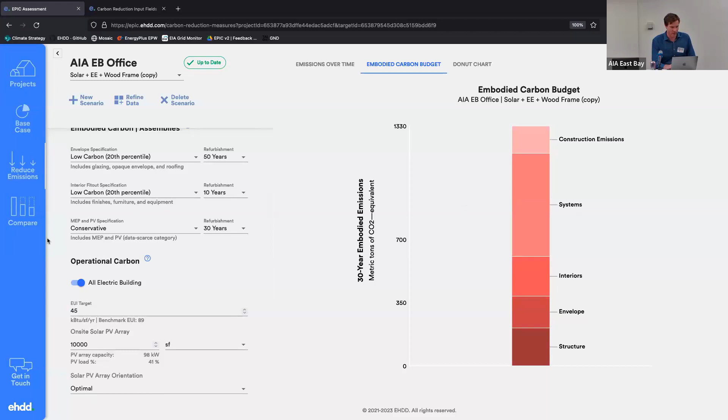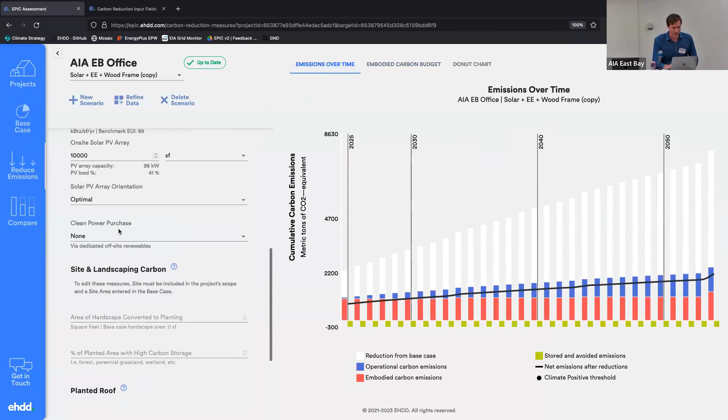So this starts to get you at some of these trade-offs around embodied carbon in buildings. And if we say, okay, still not very satisfied, we really want to go farther, we're going to set an EUI target much lower. Let's see if we can get to 20 on this building.

And does that include the on-site solar energy production? This is absolute energy used by the building. Okay, so before the solar comes off of it.

And then let's say I want to calculate solar differently. I actually don't like this square feet metric. I want to know, by percent of load, what does it mean to generate 150% of the load I have in this building with solar? What is that going to take? It'll do some math and says it's going to take about 16,000 square feet, about that big of an array.

And you start to see we're trying to pull that net emissions line down through all these strategies. So what does the green represent?

Yeah, the green is stored and avoided. This is the module D stuff. So the two things showing up here are the carbon sequestered in the timber structure and all of the additional energy I'm producing from the PV because I set it to 150 instead of just 100.

And I'm assuming from the way the chart reads that there's no end of life, like when you have to give back a sequestration. Yeah, that's correct. So we cut this at 30 years.

To sort of prioritize short-term decision-making like care. There's a little bit of funky math around sequestration that we do here, which says that if you're counting sequestration in year 1, you also need to count end-of-life emissions for timber only. So you sort of have to reach into the future, pull those emissions back to year 1 to do that accounting. That's baked in here because that's what makes it reasonable, you know? But you're right to say that this isn't 60 years like most LCA timeframes are.

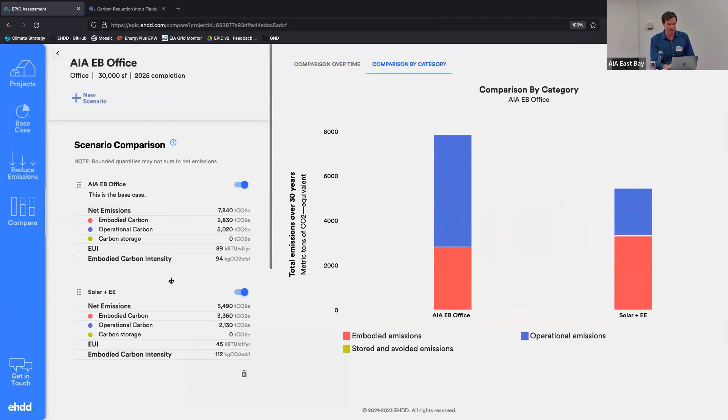So then these might be the scenarios we'd present to a client on a project, right? Here's 3 or 4 paths to reducing carbon emissions from this building. You know, the easy one, the ambitious one, and the aggressive one. And then this becomes the way we structure early conversations with clients. Might add a little more resolution to the model to figure out some of the corner cases. You know, there's always, every building is particular.

And then we try to move this forward with the targets we set here into the next phases of a project as we move into something like Tally, or eventually move into something like EC3 to do procurement.

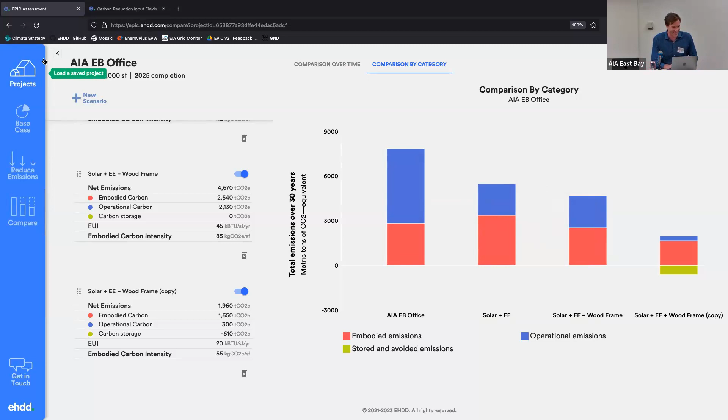Yeah, there are 4 tabs on care. If you kind of know the basics about your building and some ideas about what you want to do with it, it takes about 15 minutes to fill it out. It really doesn't take very long at all.

And then you can go back once. We don't have as many great save options as Epic does yet. We're working on that. But then you can go back and start. You can save an option as a PDF, which this whole report prints out in 4 pages of the building.

So they are really easy to use, and if we can get this care thing, I really like what Epic does of being able to do 4 scenarios really quickly. Because I think that's still missing.

But the main point we're making is not how to make a building better. We're making the point about, does it make sense compared to a new building? So we're not looking at optimizing the new building yet or optimizing the remodel. Eventually, the care tool will probably have options where the remodel itself will have low carbon options for the remodels. Like right now, we just have low carbon concrete, we have FSC wood, we don't have low carbon insulation. We don't have a bunch of things in the tool yet that will make it.